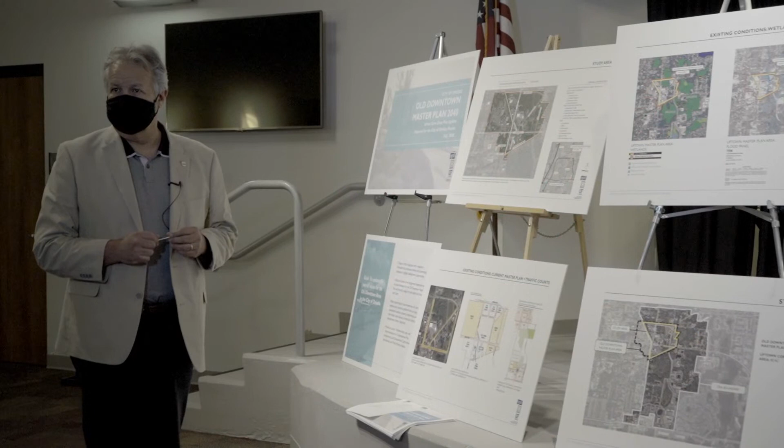Okay, we're good? We're on? Okay, good afternoon, good evening, and welcome to the Oviedo Downtown Master Plan Update Open House. My name is Javier Armana, I'm Director of Planning Services for the firm CPH. It's a pleasure hosting this meeting, which is a work in progress that we've been working on now for almost a year. The purpose of the meeting, the open house, is to present our findings of this year-long process that sets forth the platform for the vision for the old downtown area.

With me here tonight is Christina Hite, principal in charge at Dix Hite and Associates, one of our partners in the deal. From my staff at CPH, we have Ms. Lauren Harms, in the back, wave, there you go, one of the staff planners, and we'll have other people join us shortly from the firm. How did we get here? I neglected to mention another one of our partners, the University of Florida Department of Landscape Architecture Implementation Studio of Fall 2019.

How did we get here? CPH and Dix Hite have been friends of the city for many, many years in the capacity of consultants. Dix Hite was instrumental in designing where we are right now, this great gathering space. My firm, CPH, we've been involved in drainage, civil engineering aspects, some land planning and architecture aspects of the city.

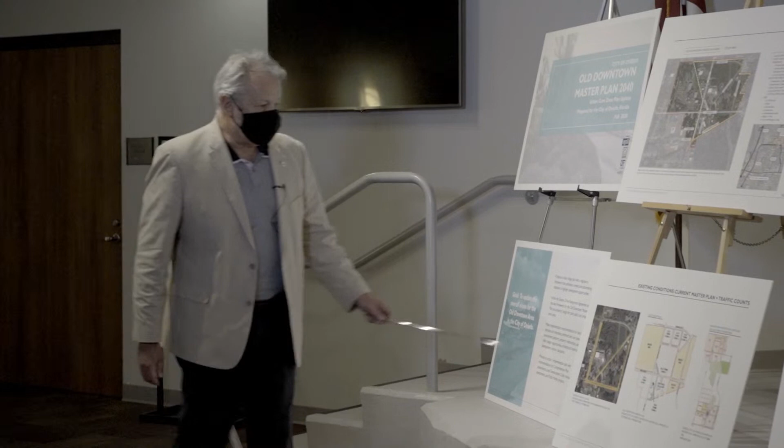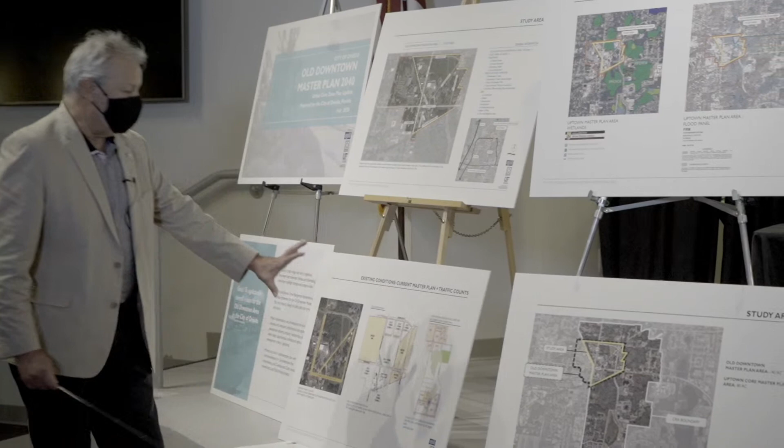We looked first at the background information. A key aspect of this was what was done back in 2002, when another firm came up with a plan for the old downtown area anchored by two bookends: where we're sitting right now, Oviedo on the Park, and anchored to the north by the old downtown. So the master plan as it stands today focuses mostly, as called for back in 2002, on heavy, intense, multi-use development at the south bookend. The north end wasn't necessarily neglected, but the energy was directed towards the south end.

At that time, conditions were different. Traffic trips were different. Development pressures were different, and there was no need, as there is today, to house residents and try to get away from Oviedo being a bedroom community to Orlando.

With all that basic information, we started going through tomes of information from the Regional Planning Council, from Seminole County, and from the city as well -- a tremendous amount of information that we started to analyze to identify trends or lack of trends. We had boots on the ground: last fall, September and October, we had University of Florida students walking up and down the downtown -- what we call the downtown right now, Oviedo on the Park, and the North End -- inventorying land uses and identifying potential opportunities for enhancing the residential and commercial base, and how to go about doing it.

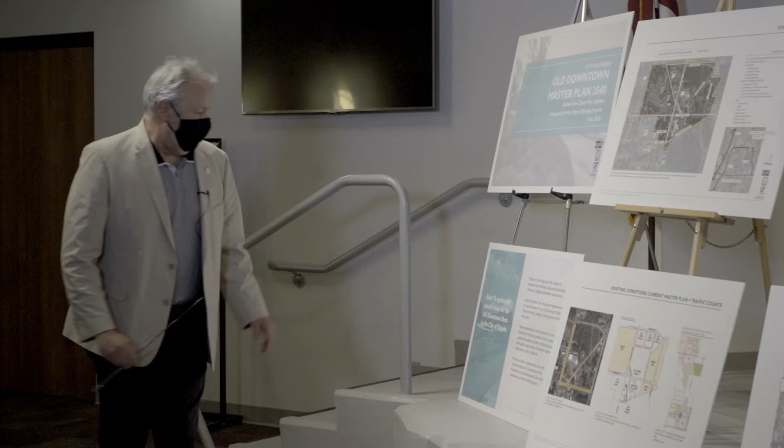So what we've identified is also a tremendous increase in traffic patterns and transportation trips, that has resulted in a tremendous amount of public investment from FDOT, Department of Transportation, from Seminole County, and from the city, from a transportation standpoint, but also from a drainage perspective. The city has invested over $5 million for the creation and uplift of the stormwater pond on Geneva Drive.

So those particular physical manifestations of growth, plus a public-private partnership between the major property owners and the city, necessitated a need to come in and uplift the plan. That particular document is known as the Geneva Drive Realignment Agreement, which calls for special consideration for future development within that area itself.

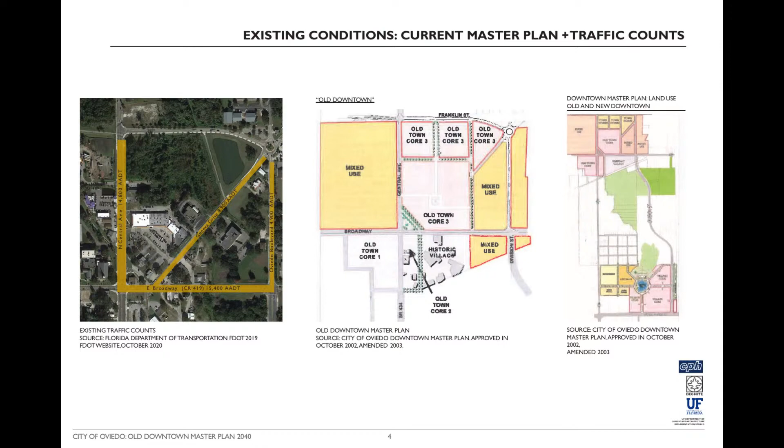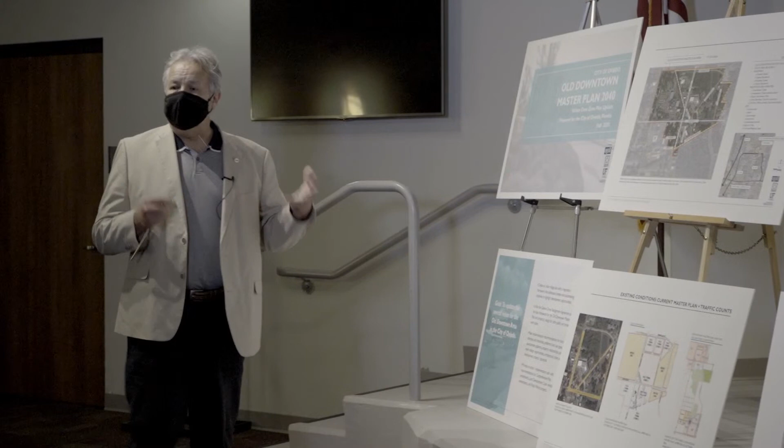So I backtrack. We have the existing conditions, past conditions, the development, the increase in population, plus the public-private partnership. That's what got us across the finish line to start working on updating the plan. Not for the sake of updating the plan, but to have a meaningful framework to move forward, to create a vibrant, village-type development within the downtown, old downtown core area that is walkable, sustainable, has a mix of uses, and is pedestrianly connected to other parts, not only of the city itself, but also Seminole County.

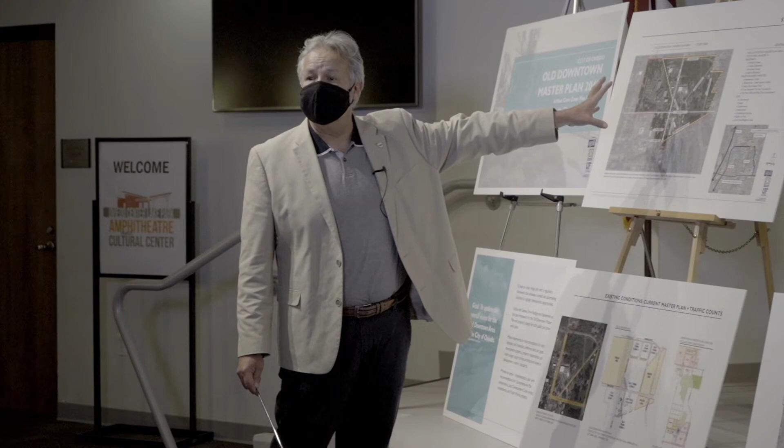And we're at a crossroads, no pun intended. We have the Cross Seminole Trail, we have another trail here, I forget the name of it. In any event, plus we have major transportation systems here. So we are at a hub, an unpolished gem relative to communication, to connectivity. And all those trips, all those people will be heading towards the old downtown to complement the energy that has been created on the south side.

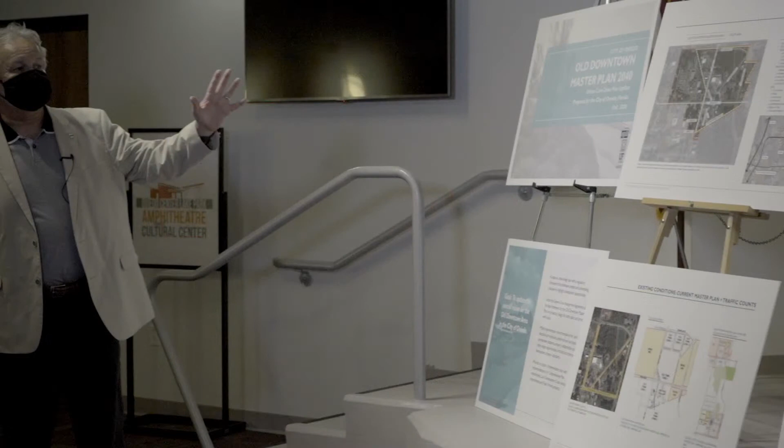So what you see here is a condensed version of the study that we've conducted, which is 65 pages plus. We have, I believe, 18 slides for your evaluation. What we're going to do is go from left to right, lightly touch upon each panel, and then we're going to have you folks come up and ask questions of each individual about whatever you would like to discuss relative to the panels themselves.

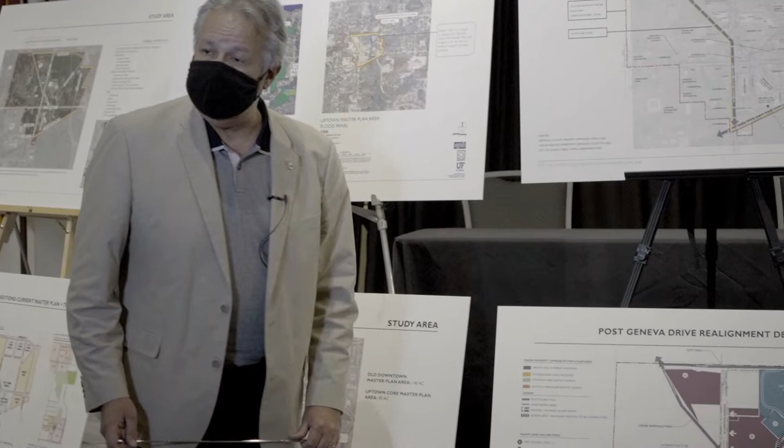So what we've done is we've gone through the dream stage, the investigation stage. What is it that we have? What is it we don't have? What opportunities do we have? Doing an inventory of existing conditions. What's out here? What are the potential impacts of the Geneva realignment and causing potential development opportunities?

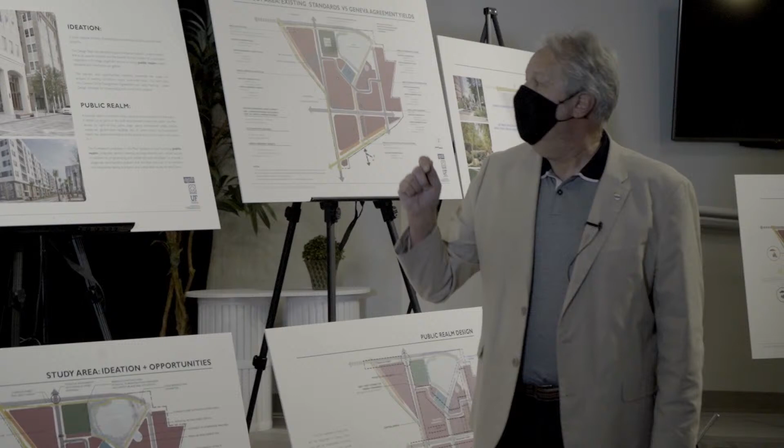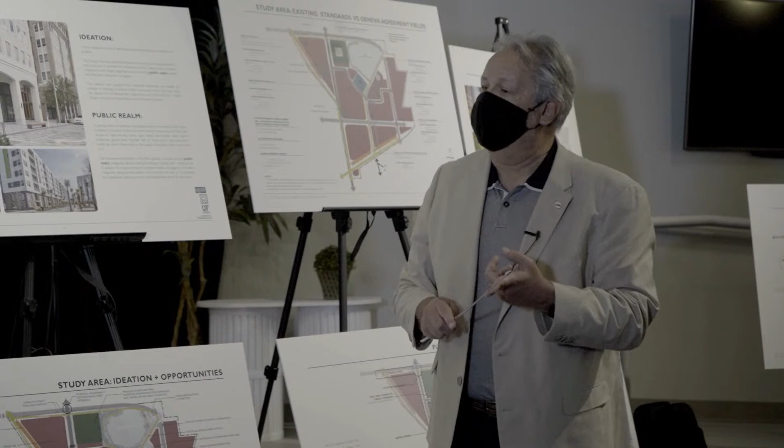But a critical point in this plan is not just doing a design where you can have multifamily units here, single family over here, mixed use over here. No, it's to create a plan that makes sense, using the public realm as the catalyst for smart development. Public realm defines the areas that are available to the public outside private property boundaries, where you have cars, pedestrians, open space, and recreation opportunities.

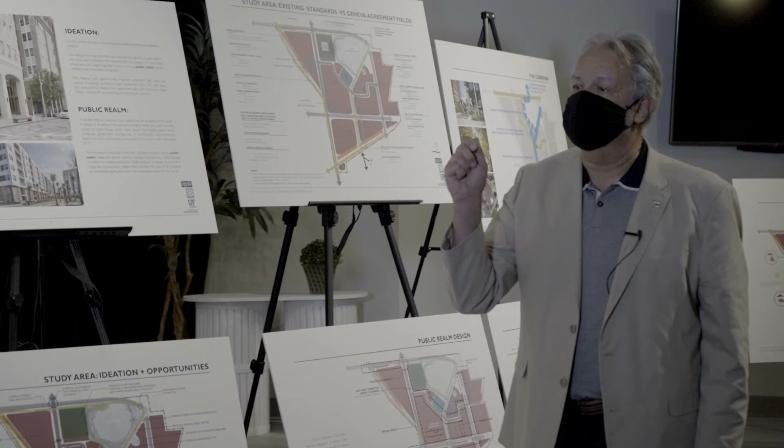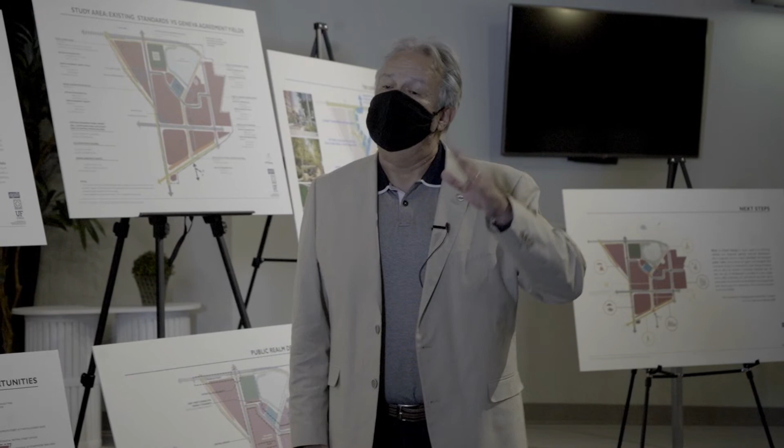So in my years of practice, and I've been doing this for quite some time, it all boils down to one thing in city planning: if you have a strong public realm, you will have quality development. It's a simple statement. You can go to some great, fantastic public realms throughout the United States. Miami, Palm Beach, West Palm Beach, even Orlando and Sanford have varying degrees of very strong public realm that has manifested in strong growth, smart growth, and an increase in the tax base without the expense of other things that need to be looked at.

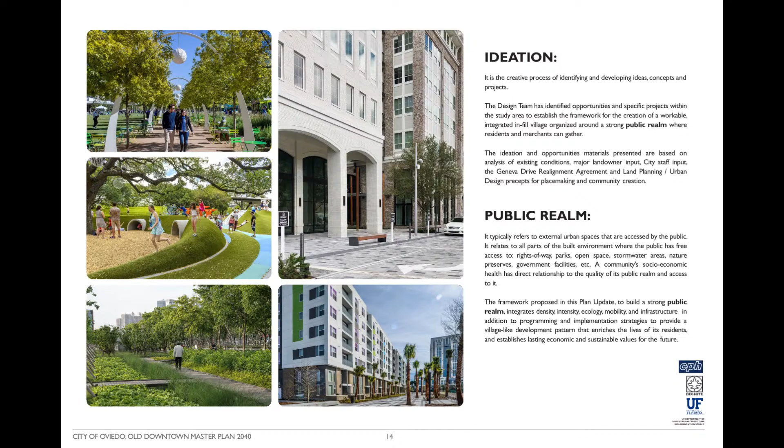So as we walk through these boards, ideation - it's one of these planning terms and design terms. But basically, ideation is the creative process of identifying and developing ideas and projects. So after we went through the basic evaluation of existing conditions, we go into the ideation, where we analyze and come up with ideas, and no idea is out of line or out of control. That's where the students came in with some ideas that we had no idea could be feasible in some of this stuff here. So those ideas are manifested and replicated and shown here, and we would call it the Ideation and Opportunities Board.

This particular board identifies potential opportunities for enhancing the North End. And as we go through individual board evaluation, you all can ask some questions. But now I'd like to turn it over to Chris, and she can address some of the issues relative to the ideation and the opportunities that we put forth. Oh, yes.

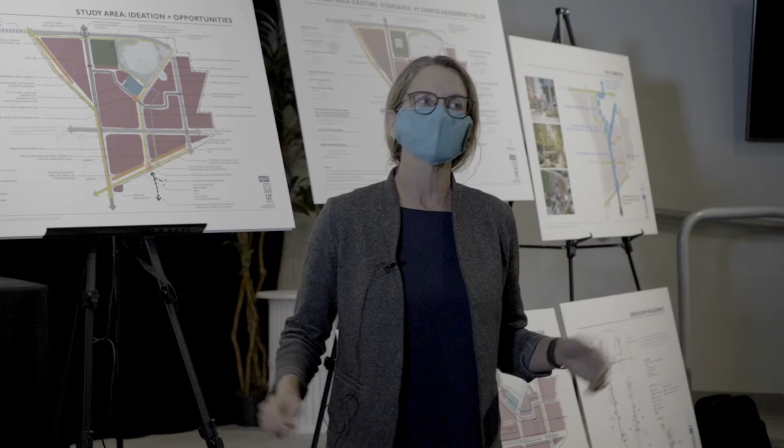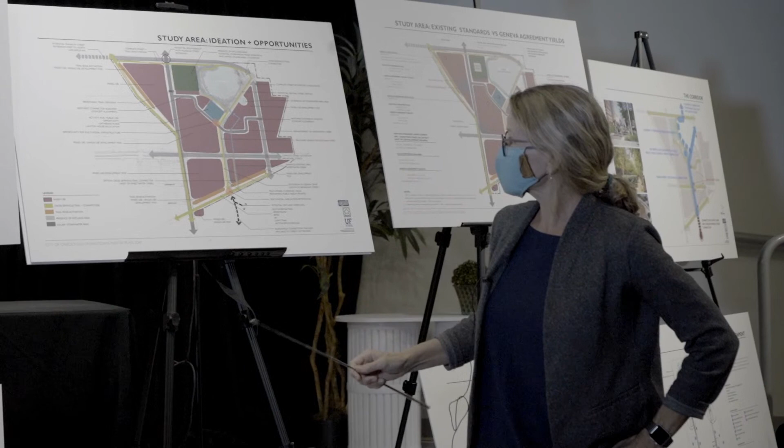The cool thing about Uptown, as we're fondly calling it, is the realignment of Geneva along with improvements happening over the years in Uptown Oviedo—not to mention Solary Park, which is going to be amazing, and the realignment of Sweetwater Creek. All of these things together start to create the framework for a really great place, a great village node.

Javier mentioned the importance of public realm. Each of the things being focused on is public realm—the realignment of a road is public realm, the redoing of a park is public realm. As landscape architects and planners, that's generally what we think about and contemplate.

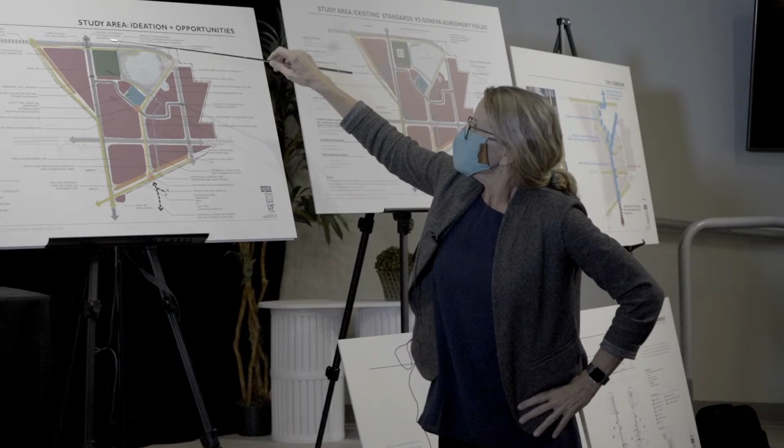This particular board, the Ideation and Opportunities Board, starts to speak to some of those opportunities. The green lines you see show the Cross Seminole Trail, which goes all the way to Winter Springs, and another stretch here. They kind of come together but right now don't connect—so you're riding your bike down, you get to Oviedo, and you want to go to the Townhouse restaurant, but it's kind of hard to get there.

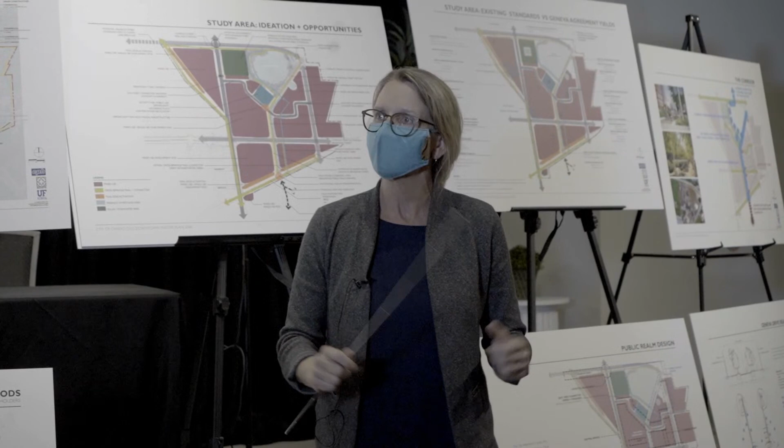This board shows how those connections might start to be made. If you're coming down the Seminole Trail right now, it's kind of tough to continue into Oviedo on the Park. If you're on a long ride and want to go to Starbucks for coffee, this board identifies the potential for some of those connections.

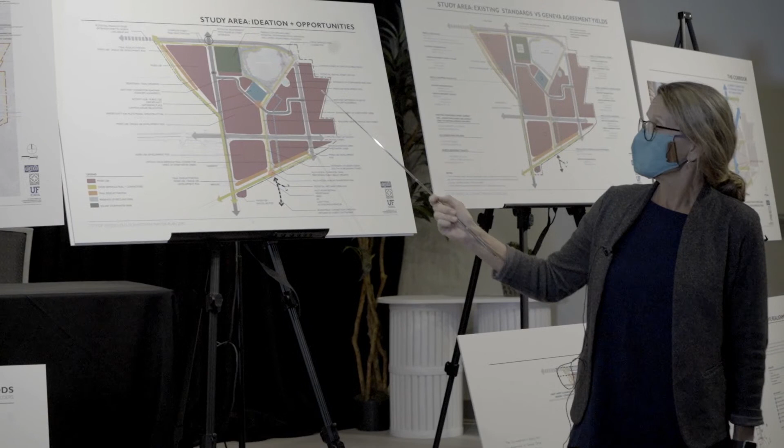Another cool thing going on is the old post office site—it starts to become, in this little rectangle, a beautiful potential square, with a lot of opportunity there. It hasn't been determined what it might be, but it could complement Solary Park. The old Lawton House could be moved there, the post office could be reimagined—there's a number of things that could happen, and it starts to become a wonderful civic public center.

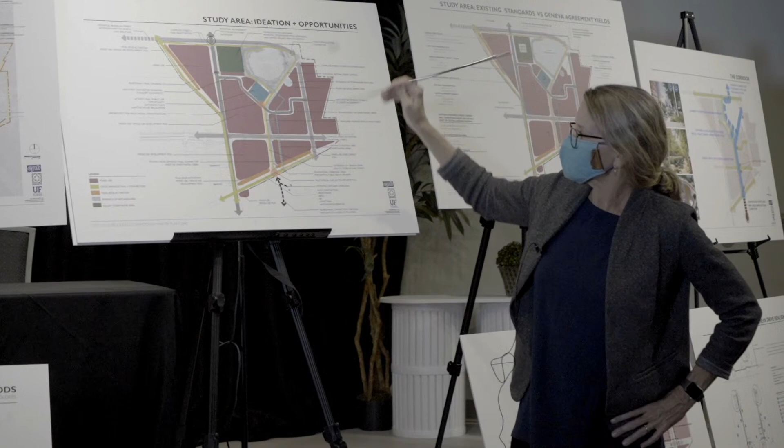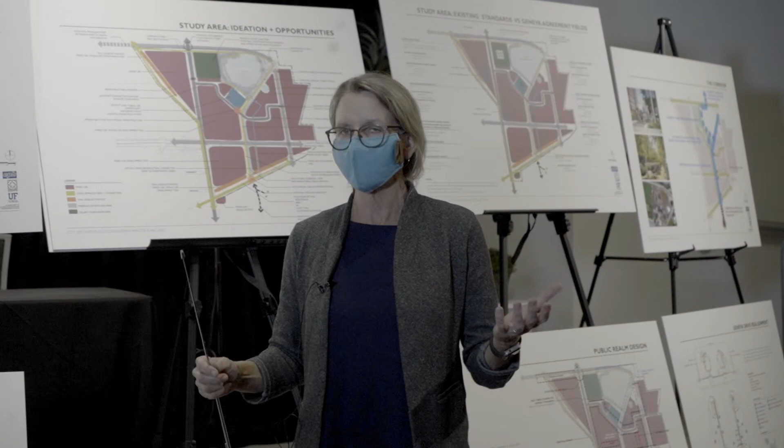There are also really cool ideas for pedestrian connectivity through the wetland strand down to Oviedo on the Park. The improvements of Broadway and Central are starting to happen—it's going to handle traffic a lot better, and folks are working really hard from the back of curb to the building edge to make those areas comfortable for pedestrians. It's challenging since it's an FDOT roadway, but a lot of coordination is being done to make it as good as it can be.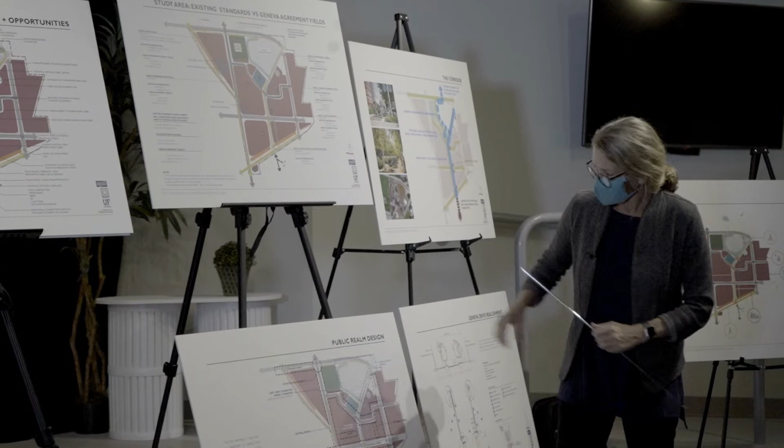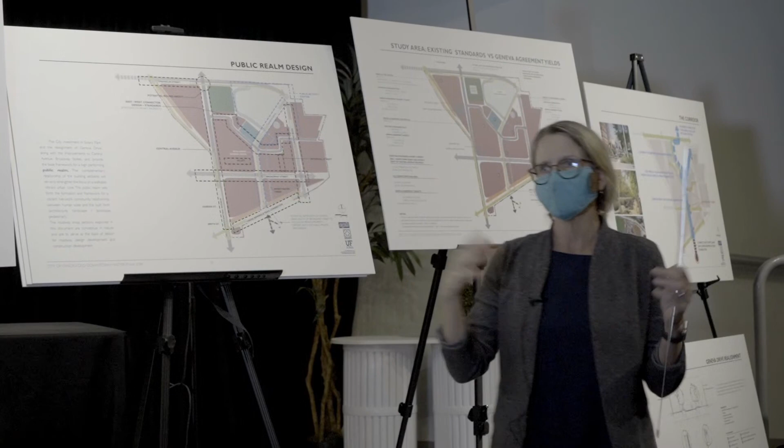Additionally, Geneva Drive—so, lots of ideas here. Before I jump to Geneva Drive, one thing we looked at on this board is, once we kind of looked at all the ideation, we then looked at all the pieces and parts of the public realm. In the overall 65-page document, you can look at cross sections for each of the roadways, defining what it feels and looks like from the build-to line, the building face to building face—we define building setbacks, sidewalk widths, where canopy trees might go, and how that all of a sudden becomes a great street.

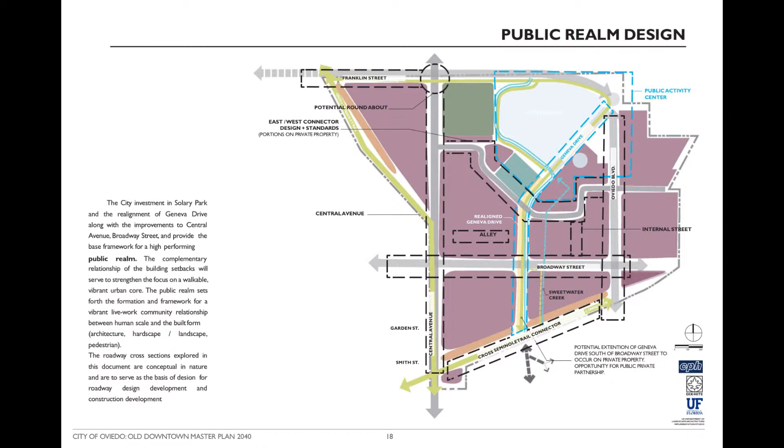We also define pretty cool opportunities for major connections between Solary, down Geneva Drive, and to these parcels and blocks south of Broadway. As I mentioned, all the pieces and parts—especially the Geneva Drive alignment—start to set up a great place, and also create blocks that can actually be built on, and built on nicely.

Before, Geneva went kind of straight with this funky angle to it, which is really hard to develop into a nice buildable block. If you think about classic cities in the New World and Old World, the most sustainable ones have really nice buildable blocks that can evolve over time—most of the time about 450 feet long by 300 feet wide. Well, our blocks are starting to take that shape.

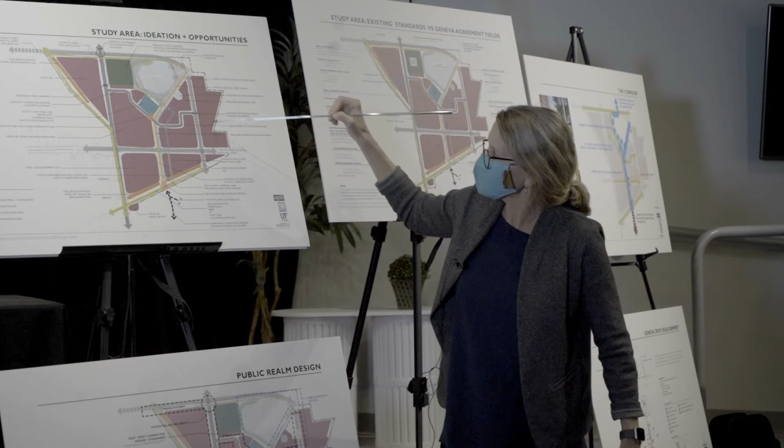So here you have a nice cross east-west street, the existing FDOT roadways, Oviedo Boulevard that exists, and now Geneva comes through—so we're creating these really great potential buildable blocks.

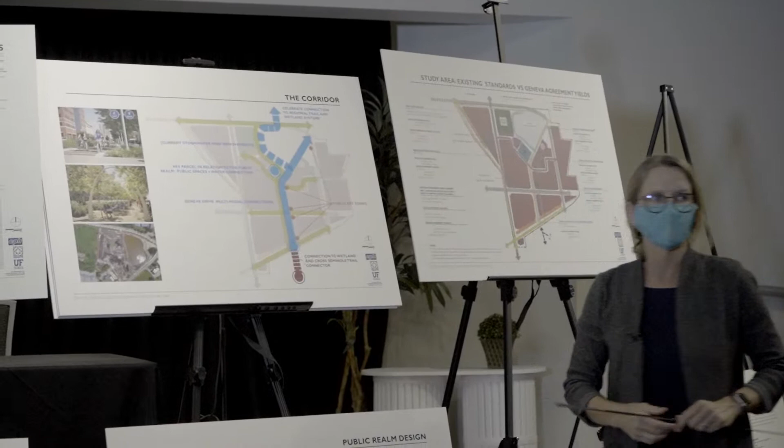So I mentioned the fact that we had studied the public realm, and we studied all of those roadways. On this board, we really want to emphasize — this is something UF was really keen on — we wanted to emphasize...

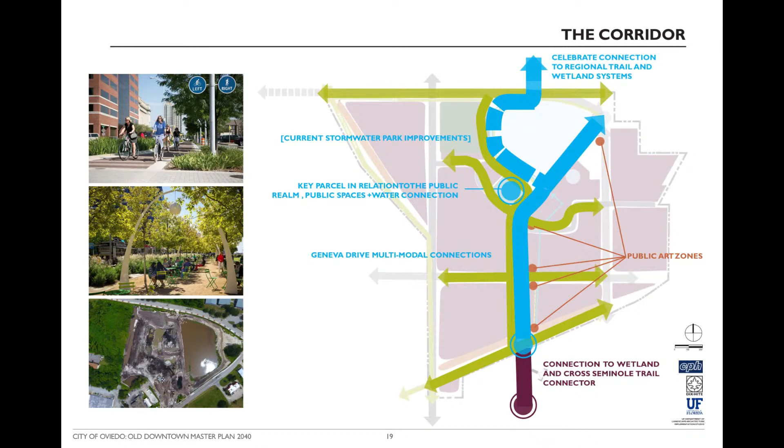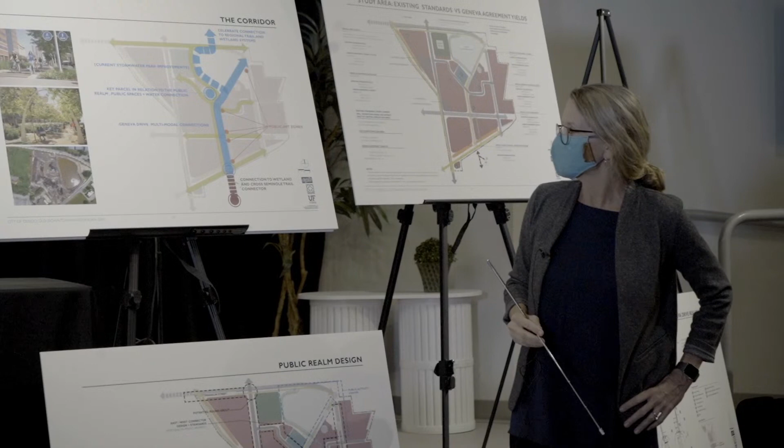the green connections, the places where people will ride, walk and bike. So the connections of the Cross Seminole Trail, the potential for civic use at the old post office site, the green stream connection, the realignment of Sweetwater Creek, the boardwalk connection to Oviedo on the Park where we're standing now, potential public art zones at nodes — really trying to create a wonderful public realm.

We also looked at the potential yields within the new block framework — what is allowed in the current zoning, and what might be allowed, what we're recommending for future levels of density. That's on this board.

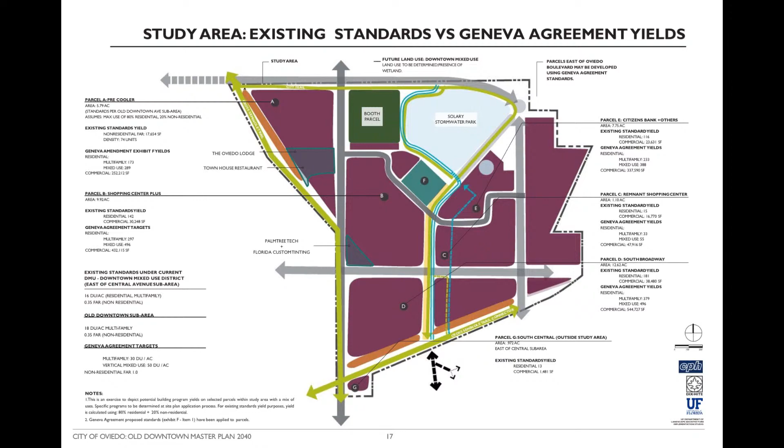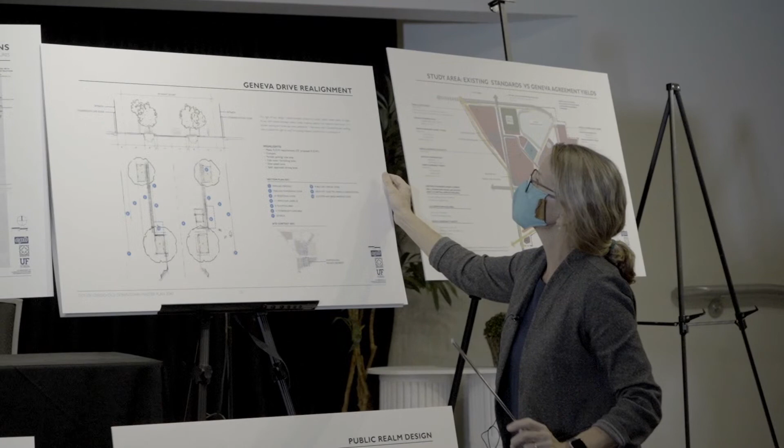This board is an example of a typical street cross-section. I talked about examining building line to building line and a typical right-of-way. This is our recommendation for Geneva itself.

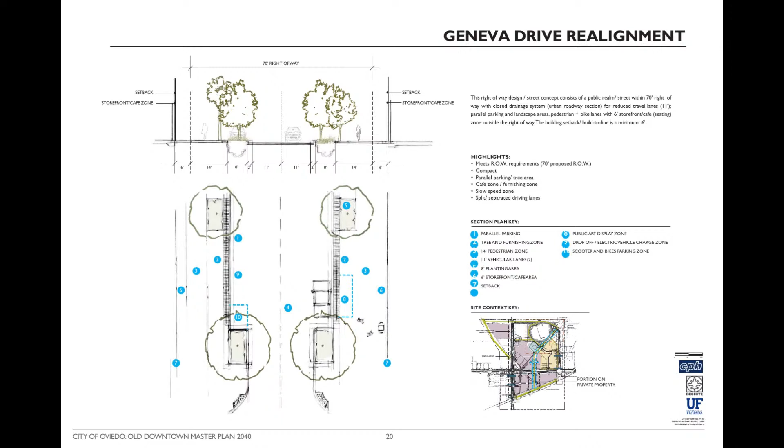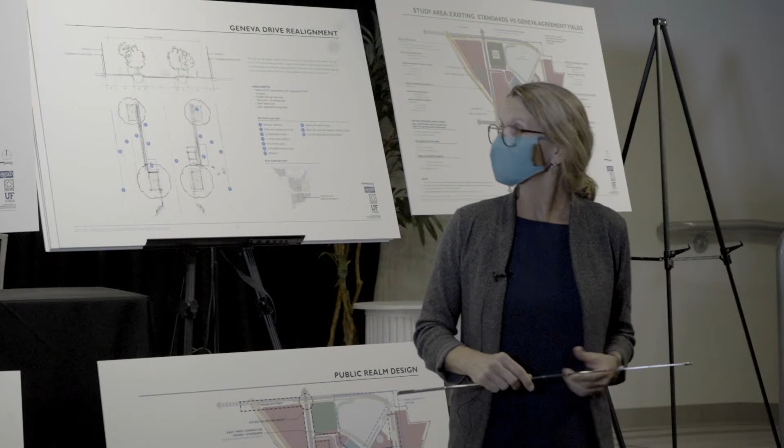The document includes recommendations for each of the street hierarchies within the study area, including street trees which will over time provide a lot of shade. Plenty of room for street trees — they need room to grow, so we're showing 8 feet recommended there. Plenty of room for pedestrians too, a nice wide 14-foot sidewalk occasionally interrupted by a smaller tree — a really nice potential future environment.

And then we talk about next steps. All of these recommendations are being passed off to the folks that are really good at modifying comprehensive plans, and that's underway now. So all of these considerations and recommendations will be taken into account as plans for the area move forward. These are simply recommendations, and that'll be determined by you all as things move forward.

Did you want to talk about the master plan? I'm going to turn over the technical part to Javier. Thanks, Chris. Yep.

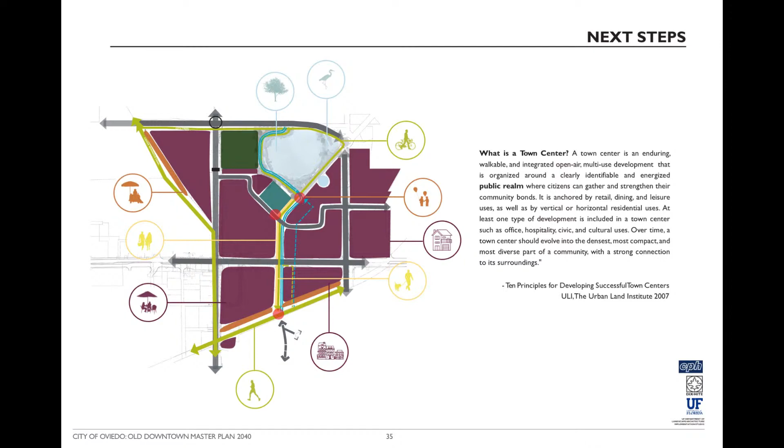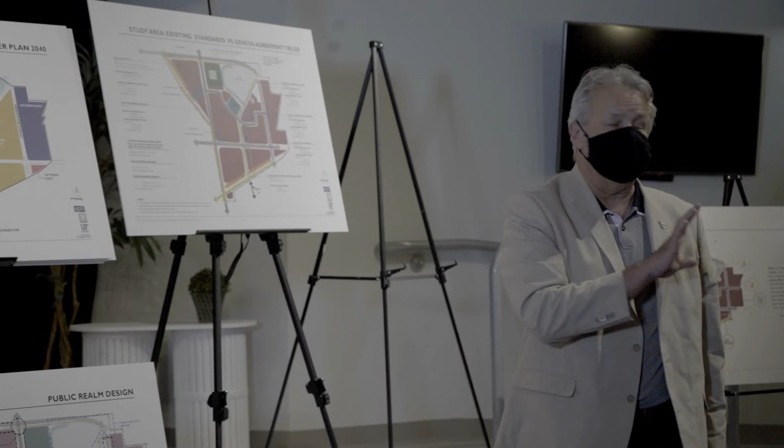Let me address what this process, this document, is and what it's not. It is not a rezoning. It is not a land use change. It's not a special plan for property owners or major stakeholders. What it is, is a vision plan that sets forth a platform for the city to consider as it conducts a redo of its comprehensive plan. These are merely recommendations.

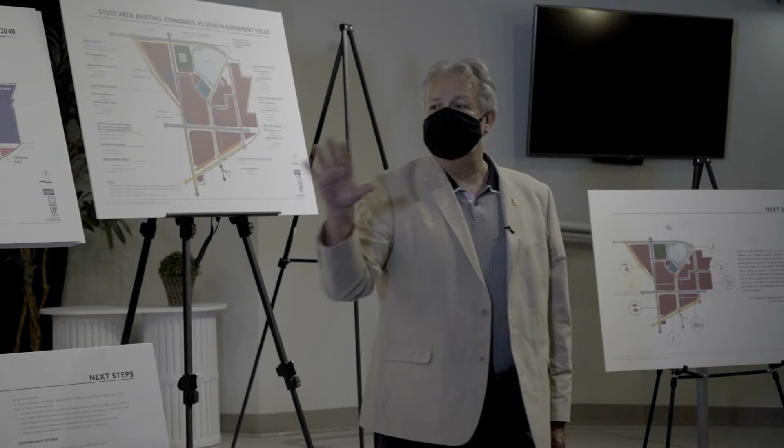As far as recommendations are concerned, under the next steps section of the document, we touch upon the normative side — by normative, I mean regulations critical to implementation of any plan. So we address suggested changes to the Land Development Code relative to design standards. We address density, setbacks, and buffers, purely as recommendations. This is the beginning of a very long process whereby staff, in conjunction with elected officials, will determine what's best for this area.

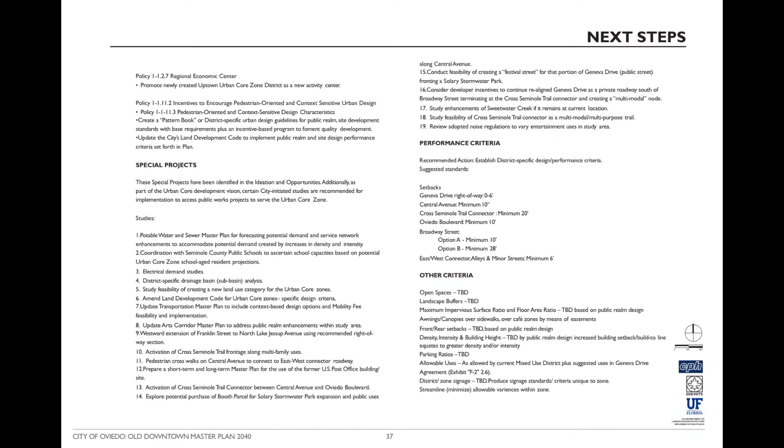We also go into special projects. We identify things such as, with potential increased densities in that area, what will that require? It will require studies for capacity relative to water and sewer, studies relative to stormwater — does that particular study area have capacity to accept more surface coverage of buildings and pavement? So we annotate and bring up those specific recommendations on how to move forward, because we have not only a design-based approach to the plan, but we'll also back it up with normative-side regulations and special projects that need to be studied to identify the fiscal implications of increasing densities — to be borne by the city, by the developers, and as part of a public-private partnership. And that's how smart growth occurs.

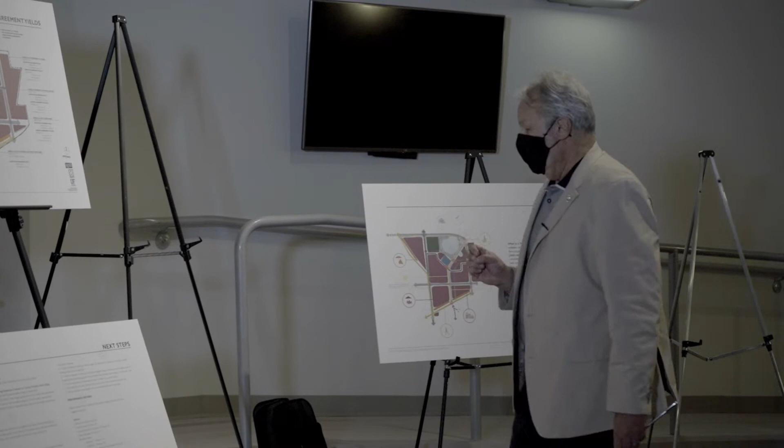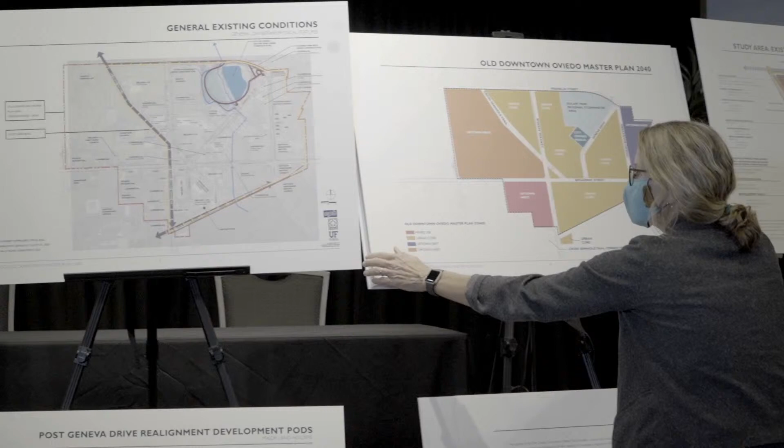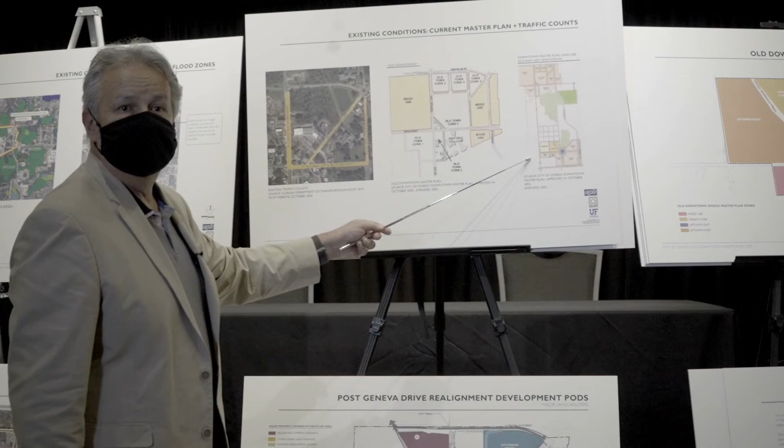As far as the plan itself, we have... we'll put these side by side. This is from the 2003 Downtown Master Plan. What we're seeking to upgrade is the plan for this area right here, which is blown up here.

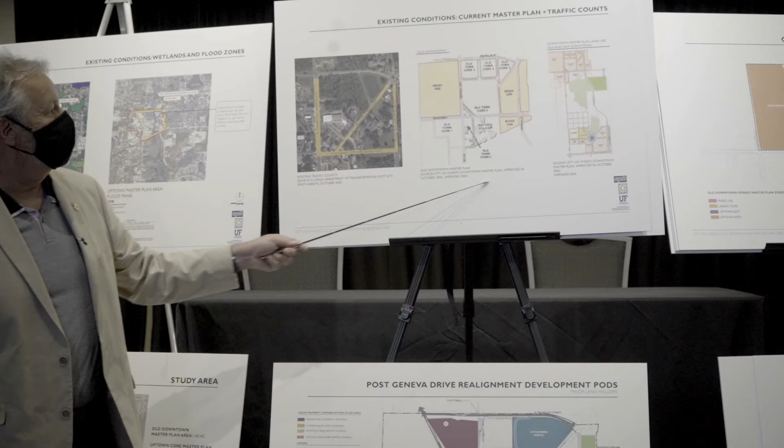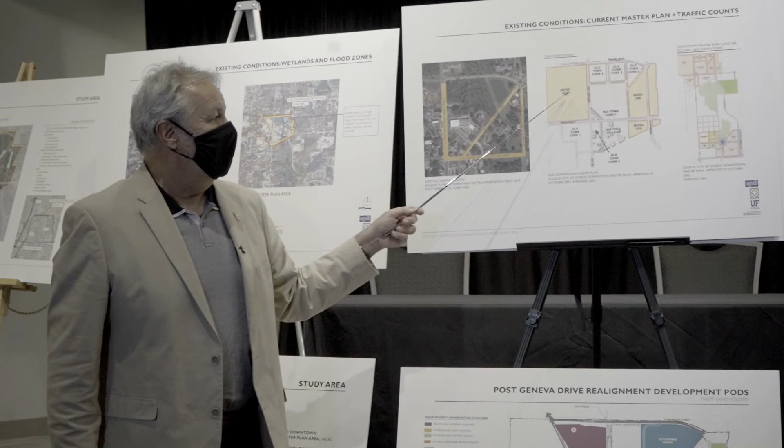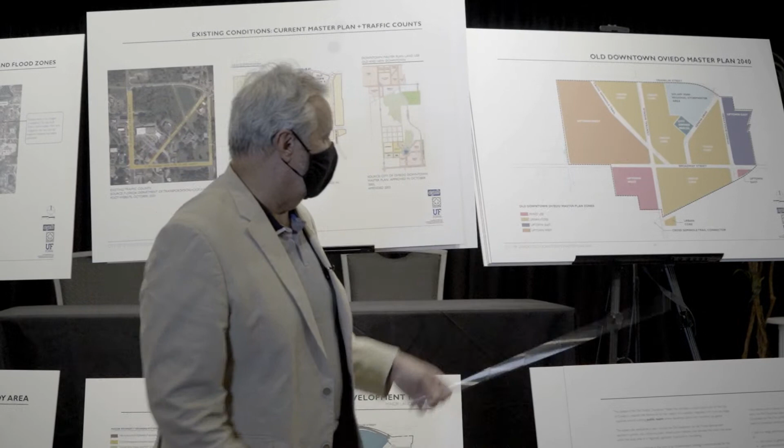We have a series of mixed-use pods — Old Town Core, Historic Village — and based on our analysis and our collective analysis, we recommend that this particular master plan graphic be adopted as the latest master plan for the downtown, the uptown area. This, along with the next steps and recommendations we're making, will tee it up for other folks to come in and start evaluating how it fits into the comprehensive plan, how it becomes part of your next wave of smart growth.

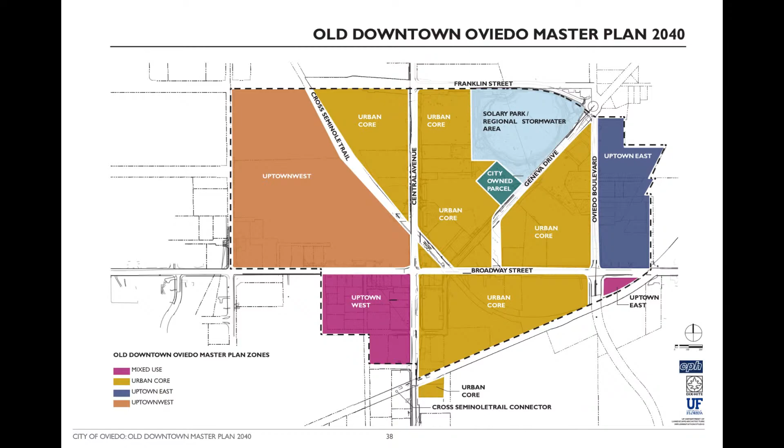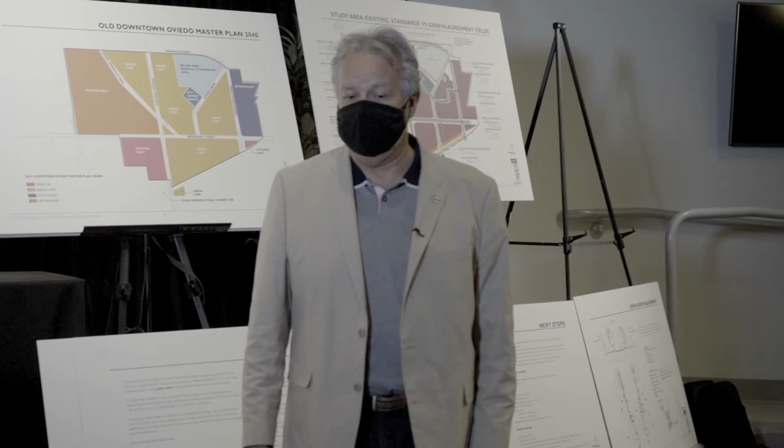So I know this is a lot of information to absorb, but the next portion, so to speak, is for you all to kick the tires. Chris and I are available to answer any questions. Thank you for your patience and attention — there's a lot to absorb. We'll take questions; I'm not sure we'll have the right answers, but we'll attempt to respond. Thank you so much.